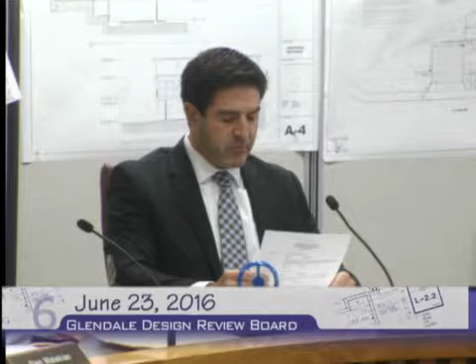And we have one remaining item on the calendar, Mr. Chairman. Thank you so much. With that, we'll start off with PDR 151-0009, 411 La Loma Road. Mr. Pagdikian, please take it away.

Good evening, Mr. Chair and Design Review Board members. This next case is a proposal to develop a new single-family house on a currently undeveloped lot. The property is located on La Loma Road at the corner of La Loma and Woodbury Road. On one side, the south side, there's the 134 freeway. To the east, there's a little commercial development, and to the north and west, there are single-family residences. The subject property is an irregularly shaped lot, approximately 6,000 square feet, and it slopes up from La Loma Road. The proposed house would be a two-story house of approximately 1,800 square feet with an attached two-car garage.

The property is zoned R1, Floor Area Ratio District 1. Staff has reviewed the proposal, and staff thinks it is consistent with our design guidelines and the zoning code. There are a few exceptions that we've noted in the staff report and recommended conditions to remedy those situations.

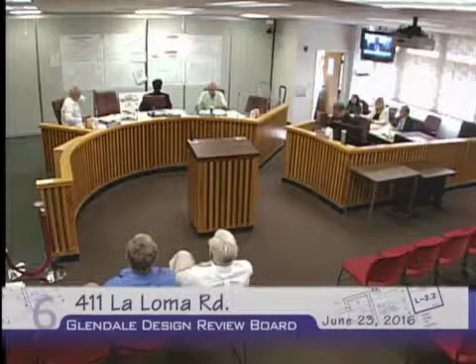A couple of questions. Yes, me as well, Mr. Chair, I have a few questions. Please go ahead, Mr. Malikian.

Based on the report I read, the arborist report didn't seem like the tree was in bad shape. It gave a B- grade, saying maybe 20 to 25% of it would be impacted. But most of these retaining walls go right up to it, and I was there and took pictures—the story pole is right up to the oak tree itself.

So are we assuming it's coming out? Because it doesn't seem like it's going to stay there. Right, the proposed plan is based on the removal of that oak tree. We based our determination on the assessment given to us by the city's forestry division. So oak tree number 1, as it says to be removed, that's going to be removed.

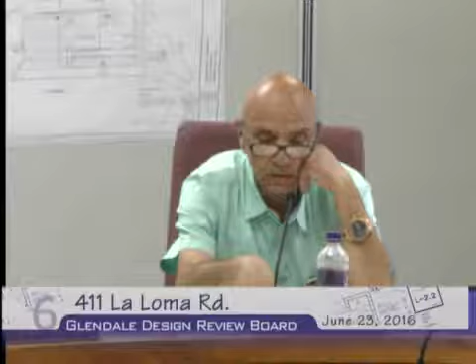And then oak tree number 2, we're assuming it's not going to get impacted, it's going to stay as it is. I think that's the proposed new one. No, there's two of them—one with the multi-trunked oak tree in the back, and number 13. Number 13 remains. Then based on the keynotes, it's a new existing tree replacing the removed tree.

Okay, maybe I've misread—the replacement live oak tree is the one in the back. So number 2, the existing oak tree, is going to be removed? Is that what it is? Number 2 is the replacement tree. Right, number 13 is the one to remain. It's a double trunk tree.

Number 13, that's the thing I don't understand. On sheet A1, behind the driveway. Where can I see that sheet? A1. Yeah, but number 13, it's there, existing to remain. Right, that's what I'm saying. So the retaining walls and everything going against that—are we assuming that's not going to get impacted, or is it going to get replaced?

Let me put it this way: our urban forestry division has reviewed these plans. They concur—their assessment is that oak tree number 13 can remain, labeled as note number 13. So that tree can remain, and the retaining walls can be designed for the tree to remain. Beyond this, the board has full discretion to concur with this assessment or recommend something different.

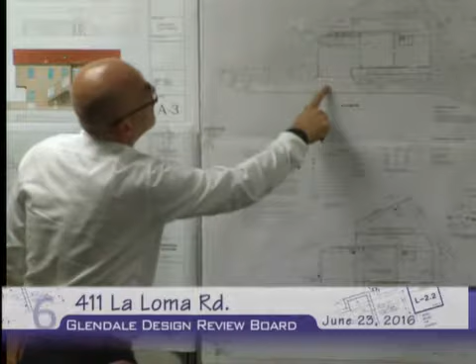That question probably should be posed to the architect. I don't even have grading elevations. This elevation is probably, God knows, about 110 here. You're entering in at 104, 102.

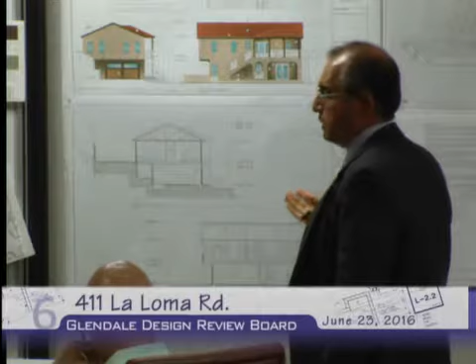We've had multiple revisions of the plans. What we have is in front of us, and if you look at the elevation, the left bottom colored elevation, let me point it out, because it's this that I'm worried about. This is all we had to work with. We don't have cross sections through the driveway in that direction, and this area is not fully resolved yet. So all these things, if the board leans towards approval, then we can work these out probably at the plan check level. But this is what we've had to work with.

No, I just didn't know what the height limitation is. That information has not been provided on this plan. I know, yeah, and we don't have contour lines. But I'm just asking, as planning, zoning, what height is allowed? This is an R1 zone, and the allowable height is not limited. The only limitation is within the 6-foot setback.

15 feet tall or 16 feet tall or whatever it is? Yes. Okay, this had come up in the initial review of the plans. That's why we recommended breaking up the wall into two pieces. The only zoning code standard that applies in this case is within the interior setback, which would be in this area here. Within the 6-foot setback, height is limited to 5 feet.

And nothing in the street side setback? The street side setback, there is no limitation on retaining walls in this zone. The only limitation is with respect to fill. No more than 18 inches can be filled. But curbs, a curb of 18 inches is allowed. That's why we have a condition that specifies the height of this curb to not more than 18 inches. The plans indicate otherwise.

Mr. Malikian, we could talk about multiple course garden walls on that end. If you think it's more suitable, we could continue those multiple walls around the corner. Mr. Chairman, I'll continue on his comment.

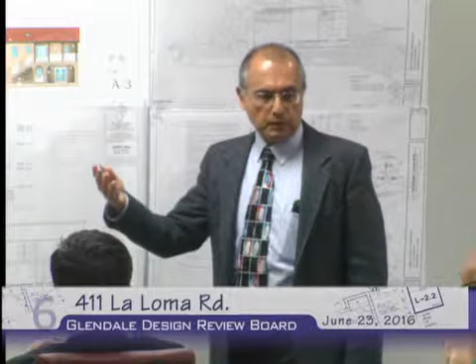To answer your question, this is what we've had to work with, and we based our review on these plans that we were given, and we figured the project can be recommended for approval. A lot of the details will be dealt with at the plan check level. However, if the board thinks otherwise, we are open. Well, I'm just concerned how the grading is going to work, but I'll talk about that later.

Since I have you here, I'm having a little, I don't know if there's a discrepancy on the plan, and we can ask the applicant. The stairs show right underneath the overhang here. Then when I come to the floor plan, where's that other floor? The stairs show where the garage ends. The reason I'm questioning it, this area seems different than the site plan, there's a discrepancy in the plan.

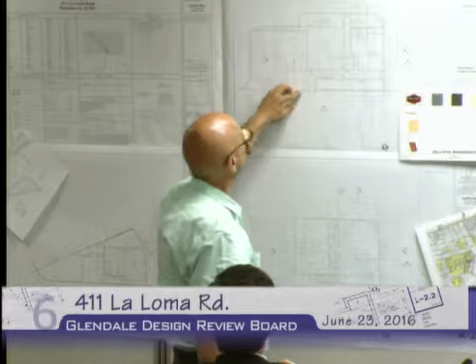The other question I had, I know you said the setback, since this is side, it's a 6-foot setback. But I'm looking at the site plan, there's 9'1" here. So essentially, I have 5 feet setback. Well, that will have to be 6 feet. It measures 6 feet on this floor plan. Not even there, because if you calculate 4'2", and you have 9 something there, that has to be addressed somewhere along the way.

And we'll also sort through that stuff. You've answered the dedication question - I was going to ask about that. The dedication only occurs in the front of the driveway. It doesn't continue straight across the front side. Right, this sidewalk, you're just going to break there.

It turns around the driveway with a 4-foot width. The way it's shown on the plan, it's probably a little narrower at the flares. It's really an apron dedication then. It's not just for the driveway apron, the sidewalk has other standards - you need to have the handicap wrap around.

I know my colleague alluded to the street light. I don't see it on the site plan. How's that going to affect the driveway? Because I think it'll happen somewhere around where the apron is and where the driveway is.

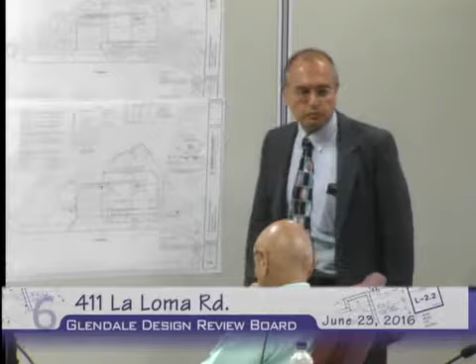It will have to be relocated or some other measures taken. But that's a historical street light. Let me see what the public works. You can Google the site, the street elevation. I have a picture of it.

While staff is looking into the street light issue, perhaps we could open up the public hearing, and at that point in time we could ask the architect and designers any questions. I'll email the pictures that I've taken.

One other question, Mr. Chair, sorry to interrupt. I also had a discrepancy on the cantilever itself - plans show different on each floor. And that crawl area, is that more than 6 feet, where it's called out storage?

The crawl area behind the garage - the prior plan showed a floor to ceiling height under 6 feet so that they won't count as floor area. The present plans don't indicate that, but we would make sure they do not count towards floor area, and we rely on that based on the height of the structure, not some cosmetic or non-structural finish.

We'll answer the wall heights when we get into that.

You also mentioned in your report that mechanical equipment is not proposed - correct me if I'm wrong. Yes, that's correct. So this house will not have air conditioning? We posed that question to the applicant, and the answer was no, it was not going to be proposed. However, we mentioned in the staff report that in case it happens, a possible location has been identified.

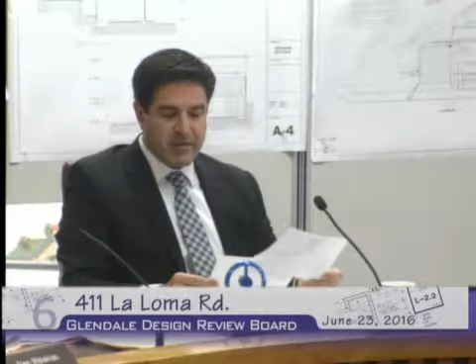Do we have any more questions for the designer? I do have several questions, Mr. Malecki. Generally I don't nitpick on a lot of these things, but it just seems like you have a very odd shape lot, and you've put in a house that's there, but all the leftover steps and retaining walls are just kind of the end result of what you had to do to make this house work.

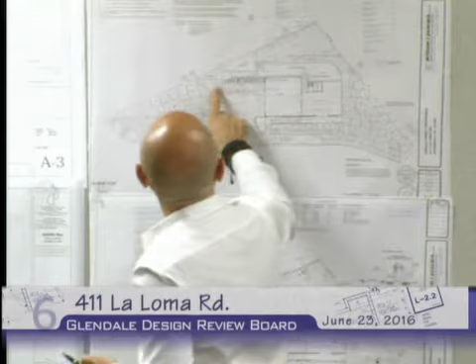The retaining wall at that corner—you have all the numbers here. You're about an average of 100.5, and your grading, which you don't have, but the contour on the plan, assuming it's correct, is 110. With freeboard, you're going to have about a 12-foot wall there at that corner. But then you have a 31-foot backup, and I'm not sure if that 25-foot radius has been worked out so you can soften up that area. But that's a 12-foot wall we're going to be looking at as it grows up to that level.

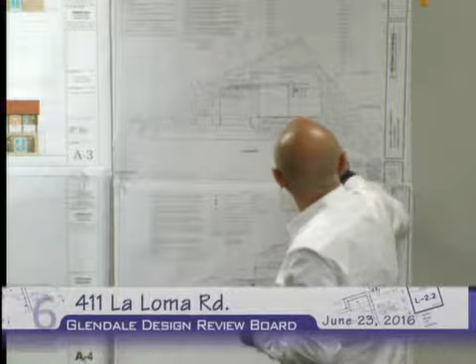The second question I'm not sure I understand, because of the information that's there, based on the steps you have and where you land. You're creating some retaining walls and other conditions here that haven't been addressed. I don't want to sit here and calculate, because this one goes straight up, and then you have another one with a middle landing. But each one of these can create some sort of handrail or retaining condition.

For the steps, depending on how fast—I assume, because this is probably the steepest part of the property, and then it's just gradually going up—there's no way you're going to follow the contour, so you end up having some sort of retaining condition there. So yeah, that hasn't been addressed.

And then you have the light pole, which is not shown on the plan, and it seems pretty wide as far as the sidewalk is concerned, but it's much narrower than what it is, and I'm almost certain it's going to be right in front of those steps. So what's the plan on that? Well, we would have to relocate the light pole, because those are the steps to get to the second floor entry. So you're going to relocate the light pole, but not the steps?

Yeah, I would have to take a look at the site condition again, but yeah. Either that, or we have to rearrange the steps and turn it into a planter to come in—instead of having an L shape, it'll be a U shape.

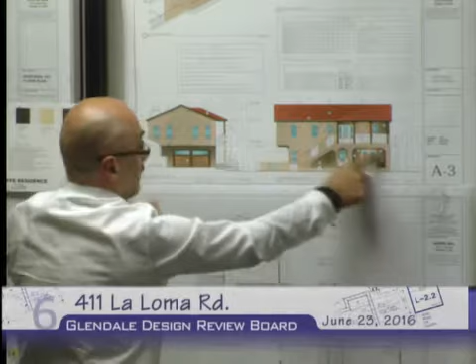My concern is the way the elevation is drawn. The actual house is like this, because the street goes up like that. I'm not sure what's going on here, and then you've got a number of steps there. So I'm not sure if moving the light pole forward or down reflects what's really there.

Okay, that's all, thank you. Question to the applicant—do you have any idea how many cubic yards of grading you're doing? No, I haven't done that part yet. Have you talked to a civil engineer about grading and drainage on this? Not there yet, no.

Because it will affect the wall heights, since you're going to have freeboard, a swale in the back, some of these walls to drain water from the back—so those will all affect your wall heights. So I don't know how you're going to deal with that.

Yeah, the owner wanted the ceiling on the bottom floor at a higher level than traditional. But you're showing an attic area in the ceiling. Actually, in cross-section it's a vaulted ceiling. Not according to the section. It's a vaulted ceiling on the kitchen side, and a flat ceiling on the bedroom side. Yeah, it's a dual roof system.

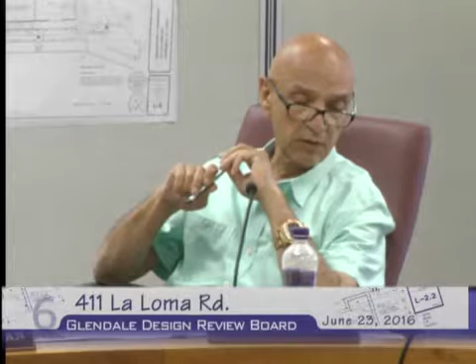So you have some high ceilings. Yeah, we have that, but you can still achieve it with a different slope. Sure, but I'll have that discussion later. Where are you planning to reduce the square footage?

As staff stated, the square footage exceeds the permitted allowable floor area ratio. Do you have any thought on where you would cut it, so we know where we stand? I think it would have to be on either the cantilever side that you guys were questioning. That would reduce that bedroom a little bit. It's only 20 square feet that we're talking about.

My last question is, I know the staff report talks about a trash area, but where is that, in your opinion, going to take place? No, that's a Mr. Charchan question. Trash area, yeah, that's a good question. It would have to be over there.

It's a tight lot, and I drive by that street almost every day, three times a day. When I saw the story poles, I was challenging, because I thought it was open space for many, many years. Because it's such a tight street, and now we're saying the front setback is there, and this side setback brings the building even closer to the street.

Have you made any attempt at a different style than Spanish? I'm not questioning the style, but a different style than this approach? We'd have to talk it over with the owner.

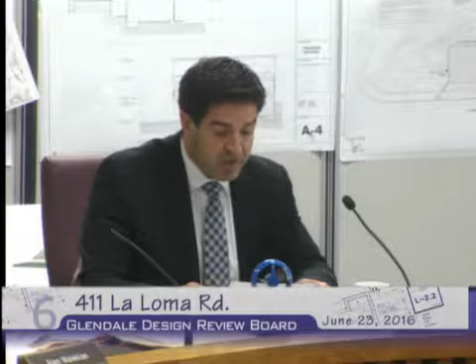I live on 545 Woodbury Road for the last 49 years. I've passed by that lot for 49 years. I'm not an engineer, but I have some experience. The elevation of that lot from the lowest corner to the height of the house behind it is a minimum of 25 feet. So the retaining wall is going to be a minimum of 25 feet, because otherwise the house above it is going to go down on that lot.

Then, if I understood it correctly, the entry of the garage is by Woodbury Road. The street, as you mentioned, Mr. Vic, La Loma comes in from Chevy Chase, goes straight, and Woodbury goes to the right. This is a blind spot. If you're going to put a garage building there, there will be all kinds of accidents in that corner because people are coming in.

A lot of people going to Wilson School cut the corner instead of going to Chevy Chase—they come to La Loma and exit on Woodbury to the school. So it's a high traffic area. When you have that building there, it's a blind spot for us, we cannot see it. Right now, with the traffic, we have trouble going that way.

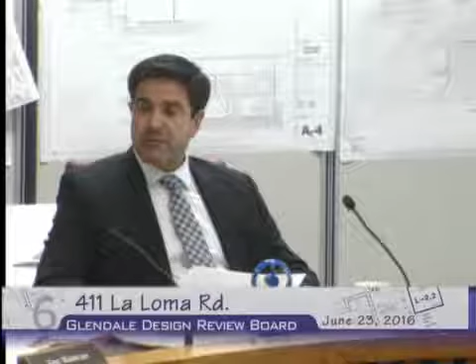Any questions for the speaker? Oh, I just wanted to address one thing. Maybe I thought you would address it, Mr. Chair. Our review is basically about architecture, mass, and scale, and compatibility with the neighborhood. Traffic issues are not under our purview.

You're saying there is traffic. We really have no authority on that. He is providing a two-car garage. Actually, I don't know if you looked at the plan in detail, but the garage is not really at the corner. They pulled it back, and they have the driveway. So in this case, they're not directly backing into the street. They're turning into the property.

But how are you going to get to the garage? Well, he's got a turnaround backup area there, based on what I see. That is going to go to Woodbury Road and get in? No, it's narrow. It's not going to Woodbury Road. If you look at the plan, it's only access from the La Loma. I don't want to create a lot of cross communication.

However, I think what Board Member Martin is trying to indicate is the fact that this board really looks at design, mass, scale, and bulk, and usually by the time projects get to us, it's already gone through the transportation department. They've already looked at it, and if there were any overarching concerns, the project probably wouldn't have come to our desk. So we don't really have that much jurisdiction to say, oh, by the way, this lot is unbuildable because of what you described. That's not in the power of this board. So we just want you to know that. But we do appreciate you coming out. We're taking your points into consideration.

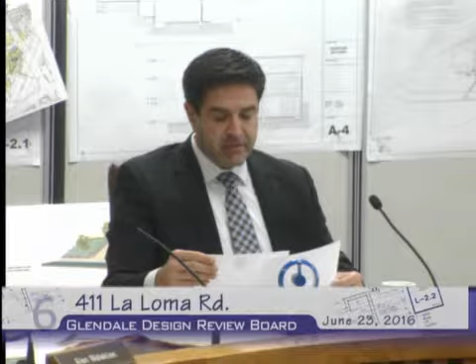Yeah, I believe the driveway approach and where the garage is situated, it's on the La Loma side. So there's substantial space, probably about 100 feet before you get to the driveway from that corner off of Woodbury. So it's not immediate from the Woodbury corner to the La Loma, it's further in. And we have our own width within our property to turn around and drive out if we have to. So it's on private property where the garage is, situated further over to the La Loma side. I understand his concern, but I don't see that two cars are going to impede on the current traffic there. We do have our own setup there for turnaround and driving out nose first instead of backing out into traffic. So I think that was itemized already with transportation.

That's it. Thanks for clarifying that. Sure. Any other questions for the applicant? So with that, we'll go ahead and close the public portion. Mr. Malakian, you want to start us off?

Sure. So, as I started before when I was asking questions from the applicant, it's a pretty odd shape and a pretty tough site. And it feels like the project has been kind of forced into this, and a lot of issues haven't been resolved. I'm not sure at what level we can accept what we have here, because as it gets cleaned up, as I see the issues, and I'll bring up several, I don't know what the end result will be. One quick question.

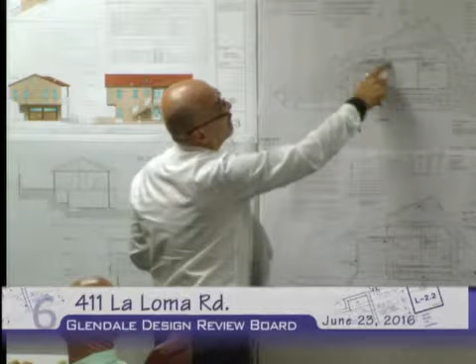I'm not comfortable creating this narrow, less than 5-foot retaining wall here. And then the back up here is about 31 feet. So I think that if the 25-foot radius arc is placed in, we may be able to put in a secondary planter here and possibly bring this in and kind of wrap this thing around and soften that section up, because it is a pretty big retaining wall there. Why not just make the retaining wall curving?

Make the first one and then put another one next to it. In other words, we could even do a double retaining wall without encroaching into the 31-foot driveway and keep as much of that. Well, I don't know if you can, because then this setback is going to get less, you know what I mean? Then the height of the retaining wall - let them figure it out. But I think a double section of this can soften this section.

All the cross-communication and mumbling kind of makes it hard for us to understand what's happening here.

Thank you. So that's one of the issues that I have, because that's pretty much one of the biggest things that we're going to see there. The second thing I want to bring up is the inconsistency of the elevation. So I like the simple architecture, simple design, but I think there's a lot of things happening there that a little bit of simplification of the design is going to really help this.

Having these solid wrought iron, and then all wrought iron here with these ornamental railing with wood columns, and then coming down here, there's more of a plaster. So I think a little bit of a consistent effect, possibly creating this heavier base, maybe a lighter top could help, or even creating the same kind of look here.

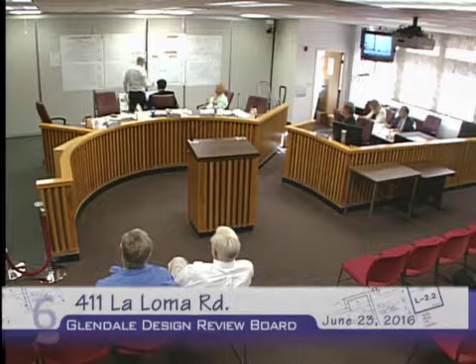That's one. The second thing is the roof - I'm not sure, I can't tell, lightweight tile, I don't know what this thing looks like, if this is like one of those fake plastic looking ones. Oh, there it is. It's fine, but I think this gable roof versus the hip roof versus the gable ends, and these little details there - all of these things kind of come together, and it's just making this a little bit... whatever it's there, we just kind of put it in there and get it done.

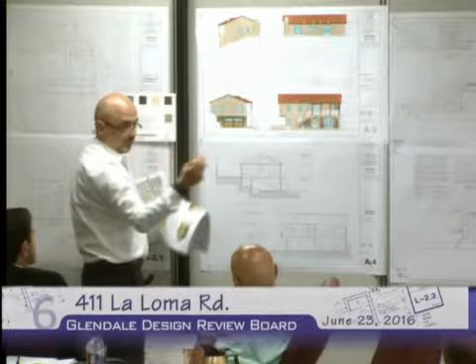You have this overhang, I don't have a problem with it. I think it's interesting, but what creates an issue for me is where this overhang starts merging in and letting it sit on this retaining condition. So for that 20 extra feet, what I would do is bring this out so that this whole thing becomes more of a floating element, that it's not part of this retaining that's sitting on the ground, or create something different here that this literally sits on its own and doesn't end in a retaining condition.

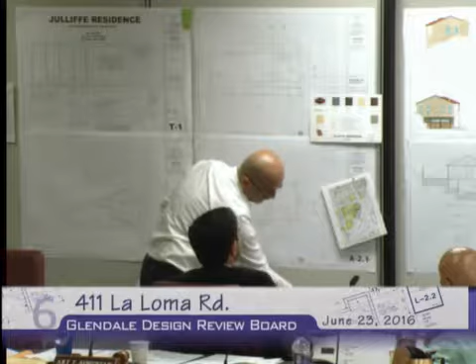So I think you can see this happening here. It just feels like an odd shape. I would also look at the window placement. I think the window placement, the proportions of the window, how it's coming up to the bottom of the rafter versus the proportions of the windows - I think those are definitely something to look into.

That's it for now. All right. Thank you, Mr. Malakian. Mr. Mardian? Thank you, Mr. Chair. I had similar comments - he addressed some of them, but my main concern is that I don't see a drainage plan, and I have issues with some of these walls.

As Mr. Malakian stated, and I stated earlier, the property at the street elevation has a good slope there, and how it's going to look with this building, I can't tell until that's done. My major concern is not necessarily the square footage, though he's right at the edge there. But the mass and scale to me is not there yet, because when I look at this site planning, it's essentially a rectangle, and the only articulation I see is the porch in the front.

I feel also that the roof slope should be reduced if it is Spanish style. The other concern I really have, the main one, is that although this calls out as a side setback, further articulation is necessary to break this building from hovering so close to the street, especially the second floor. Now what does that do to the floor area ratio? That's something different, but I think further relief is necessary on the Loma side.

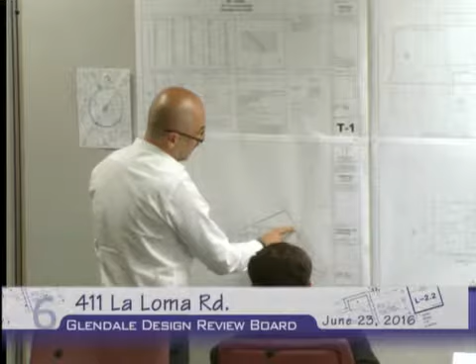Then on this side, number 4 says new low block wall along the sidewalk, which we don't know the height of. Over here it says new 42-inch block wall. Then based on the steps, if you count them, this section is lower than the adjacent grade, and they're building a 24-inch slough wall right next to a power pole.

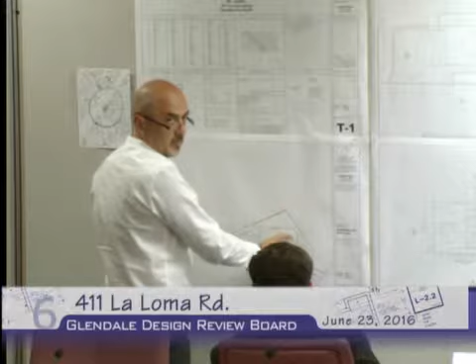I'm not sure how that power pole is going to work with the foundation, and lowering this—you've got building structures on the side, fence walls, so there are a lot of these site issues that I think need to be resolved with the civil engineer looking at this, and some grading, as Mr. Mardian suggested, the drainage and some retaining walls and other things.

It's a tough site, it needs a little TLC. It needs a little more massaging to fit it in more appropriately, because—correct me if I'm wrong—when you have steps climbing more than 12 feet, you need a landing. On some of these plans it's a straight shot of stairs, but then I see it breaks at a landing, and that's what I'm going to see first when I drive up La Loma. I'm going to see these stairs in front, and if you're saying the code only allows 18 inches in the front, you are right, Mr.—

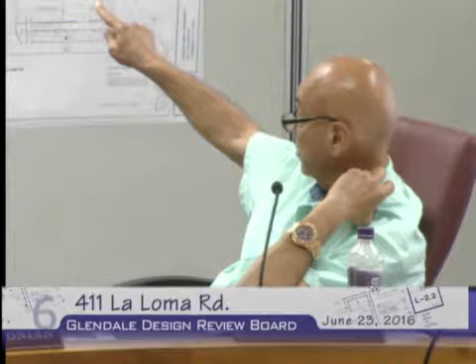Malikian, because the walls there are more than 18 inches high right now, and he's got to step all these 18 inches all the way to make, so he'll have another slope going to that 6 feet. The building is drawn as a flat ground property, so it needs to be drawn at an angle, so you can see what these walls look like.

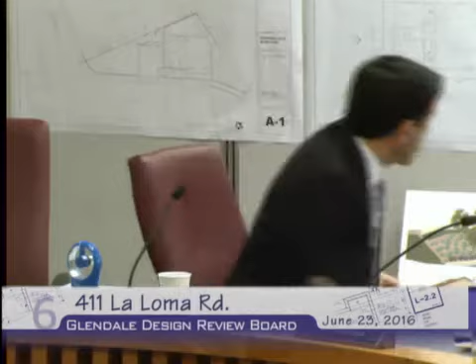I had another thought which I had forgotten to mention. When we're looking at this rendering, imagine you just don't see the stair here. Imagine if the stair is not there, and imagine that this cantilever is more in line with what Mr. Malakian was proposing, and the corbels were done a little differently, and the window placements were thought out a little more.

Then this component, which is really that balcony, starts to have more of a traditional Spanish feel to it. The reason why it feels a bit awkward is the main entry is up here, and those steps automatically give it more of a rear granny dwelling kind of feel, more of an apartment feel to it. That's right.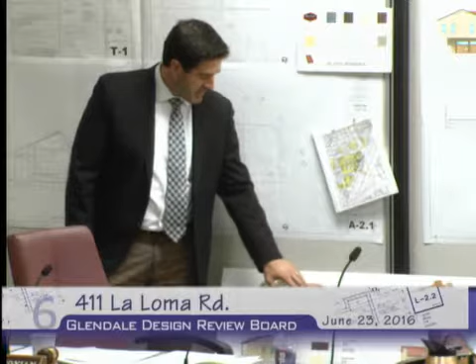And that's really being coupled by the fact that we're trying to create a bedroom downstairs as opposed to an entry living space downstairs, where then the more traditional private items would be upstairs. So in this case, you have the kitchen, living room upstairs and a bedroom downstairs.

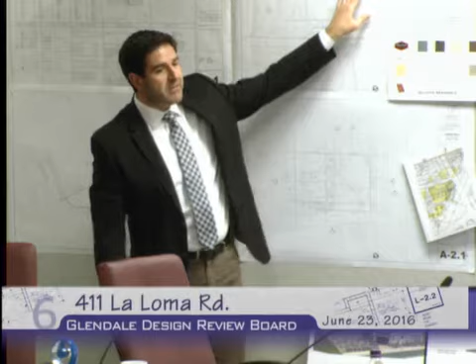A thought would be, what if you actually had the bedroom upstairs, so you had all the bedrooms upstairs - then in essence you could probably add another bathroom here very easily. And then you could push your kitchen and living down here and have it this way. Well, it's a thought. Yeah, but I think having the open space upstairs to be able to use that, you know, off of the living room, there's some...

What you're saying has validity to it, because I think the stairs having a section on the outside can be eliminated, and you can create an entry on the ground level, and then you come in and go up, so that entire mass is eliminated from the exterior. He could easily achieve that - he almost has an entrance opportunity already. If this really becomes more of an entrance, then he goes up, and we've eliminated the awkwardness of that.

That gives you a little more residential versus a multifamily feel. Now, the other thing is that once you have those steps - if you get rid of the top hat at the top entry, or the landing, stairs and all that - it somehow gives this layering of scale from the street side, so you have a mass, and then it goes back and goes up higher. Whereas if you eliminate that, then all of a sudden you only have landscaping, and boom, you have a two-story right next to the sidewalk.

So that may be another option. Well, that was my earlier comment, Mr...

Malekian, even if the stair is there, that second floor should be pushed back, or create a roof or something. This is not really helping the confusion about what it's trying to do. It's not helping the massing of this building.

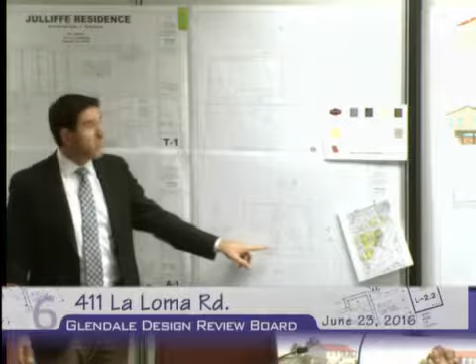But maybe it's a combination of everything we're talking about, because this is about 17 feet wide. It's a huge bedroom. So you could absolutely create a very nice, meaningful entryway with a nice closet area. Go up, and instead of having the door here, it's the door here, and it's a nicer entryway, probably more meaningful than going outside and walking up where you're exposed to the elements.

So anyways, I think we've kind of, should we then maybe see what conditions we have, and then give some direction, or maybe a combination of everything we ask to look at it again? I don't know.

I guess could staff review the conditions so far, or comments? In the staff report, there were extensive conditions. I'll read those to begin.

Number one, the yard area to the north of the house shall be landscaped with a limited concrete landing area as shown on the site and landscape plans. The section on sheet A4 should be revised accordingly.

A location for trash should be indicated, and if it's in the garage, it shall not reduce the dimension. Retaining walls at the driveway shall have a stucco finish to match the house.

Proposed walls along La Loma Road shall have a stucco finish to match the house and shall be limited in height to 18 inches. Existing chain link fence shall be removed. Block walls elsewhere on the site shall have the same color and finish as the rest of the walls on the site. The exposed faces of the proposed wall along the north property line shall be decorative on both sides.

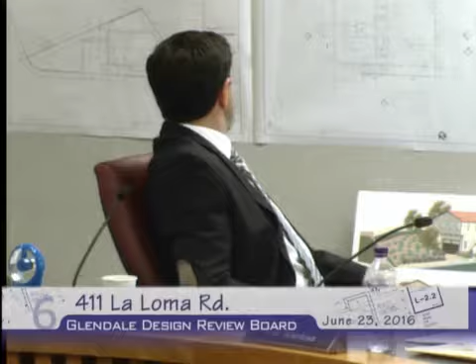I'm happy with the way the garage condition is, actually. It seems to be the only way at this point, without going through an entitlement process. So is there a consideration to redesign to have a true backup space?

The only way I see that occurring possibly is mirroring the house, where the driveway is here, and then the garage goes all the way to this retaining wall. That way, the garage isn't part of the FAR, or the allowable buildable area, and it goes all the way in. That's the only way I see that happening, with direct access you mean?

That's the only way. I don't think he's going to make it, and the reason I'm saying he may not make it, is because the slope of the sidewalk curb is much lower there, so he's got to ramp up to get to that garage. He's going to have a sloped drive.

And if that doesn't work, there's no way to have it. So maybe it's wise to just remove that condition. Right, yeah, okay. Scrap that.

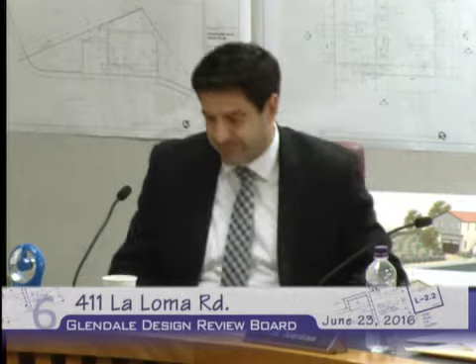Was this a consideration or a condition to locate the entry at the ground floor? I think that's one of the items that we're about to discuss, along with the item you mentioned 5 or 6 items ago, which was the removal of the steps and reconfiguring the front.

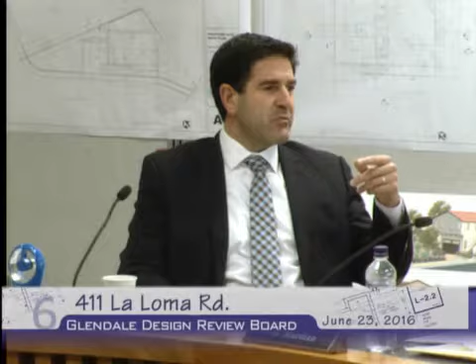Those two really go hand in hand. Well, there's a historic light post that's in the way of the stairs. You're talking about the reconfiguration of the front entry, removing that roof form. We have to resolve that somehow.

All the pieces change there. Can you add a couple of small little items that I missed?

There's a skylight that is shown right above, in front, facing the front. I would like that skylight to be either removed or placed somewhere else if they need to, because there's a window in front of it. It just brings more of a contemporary effect facing the street.

I think that's something we need more information on to see what that actually is. The way it's drawn, it's a tiny little square. He has it in the bathroom, over a bathroom, and there's a window there. So I'm just not understanding what that skylight is all about.

That's one thing. The second thing is the consistency of the windows. There's either single hung or double hung versus casement, some of these windows need to be more consistent, and especially the openings too - the way they're narrow, the proportions just aren't proportioned to the building and the Spanish style they're trying to create.

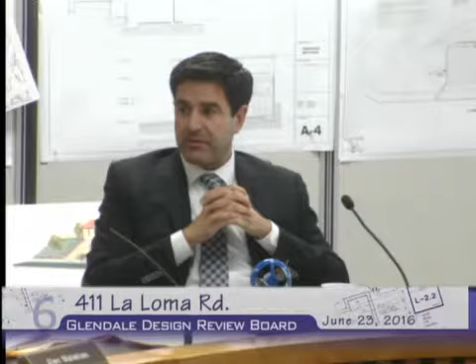They need to have the accurate street elevation in. You need to plot the accurate street profile and set this building so we know exactly how high it is from the south end, as it relates to the street.

Okay, so with that, could someone entertain a motion? I'll move to return this for redesign with conditions and considerations.

May I suggest something before that, if I may? It would be advisable to recommend that the applicant consult with Water and Power regarding the power pole, Public Works Engineering regarding the light pole, and the city's arborist regarding the oak tree, so that as the plans are modified, they have that understanding in mind and modify the plans accordingly.

That's what was discussed by Board Member Malekian and Mardian, to have those initial meetings with the respective staff. I think planning definitely needs to be part of that, so at least they are involved and can walk them through, making sure they're in contact with the correct people and get the correct answers, rather than the applicant taking the lead, meeting with these people, and bringing back the information. I think it would be very important for staff to be involved with that.